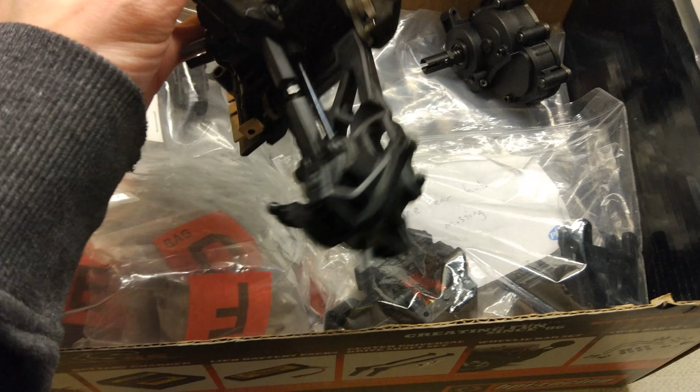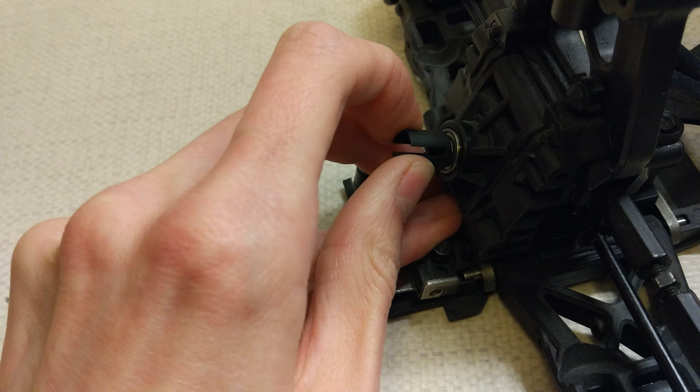It's similar to the Techno in that some of it has been built already. You can see they've built part of the front end here - clearly not particularly well. And the drive cup is also pulling in and out a lot, so that'll need shimming correctly.

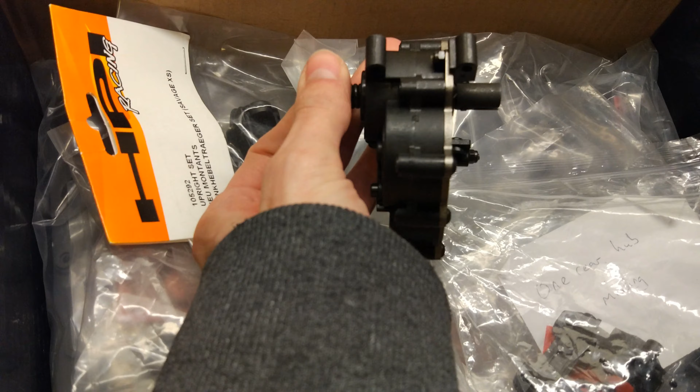They've also built the centre transmission, and they seem to have done a bit of a better job with this. Although I'm not sure about the slipper clutch, I want that to be assembled correctly, so I'm going to rebuild this transmission quickly as well.

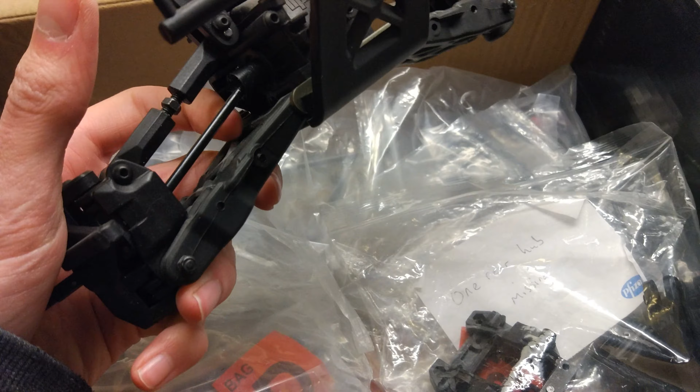And they've included a new pack of the uprights - these are like the hubs basically. I think the guy used this as a parts car because he did say some bits were missing, like the Techno had a few bits missing when I got it. He said a set of lower arms and upper arms and a hinge pin holder was missing.

So there are a few bits missing, but I have ordered those from Model Sport already. This looks - oh yeah, it says there's one rear hub missing, that's bag B in there. Then we've got some other bags which have been opened here - bag E and E2, I'm guessing they're bits to do the transmission. Then we've got DF, some other bits in there. You can see pretty much all of these bits are unopened for the most part - they're like the TVPs, I think, in there.

What's in here? That looks like maybe the battery tray holder. We've got the body mounts and the wheel hexes in there, and by the looks of it, the shocks as well - this has got aluminium threaded shocks. It's also got universal drive shafts, which are in there, look.

So yeah, looks like it comes with some thread lock, although it did come with this little bottle of thread lock in here already, so that's quite nice. I've got one of those already, but you never have too much thread lock. And then what's in here? I think we got some bits from the rear end in here. And then in the bottom, I think they're the part numbers that it needed, which I've already ordered, so I'll just stick that to one side.

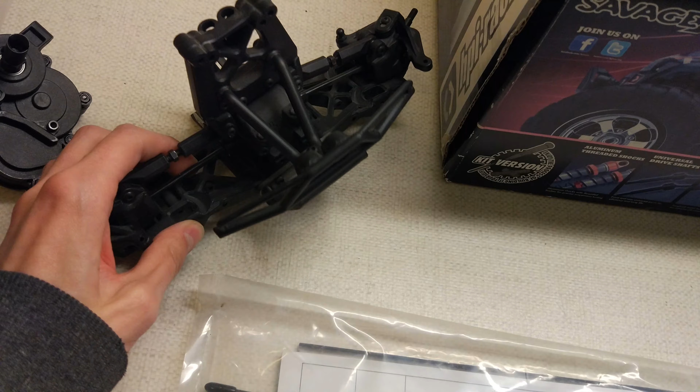So anyway, probably going to start by tearing this bit down and just checking through the manual and make sure it was built correctly. So yeah, that's my new Savage project. Might take me quite a while, but yeah, we'll see.

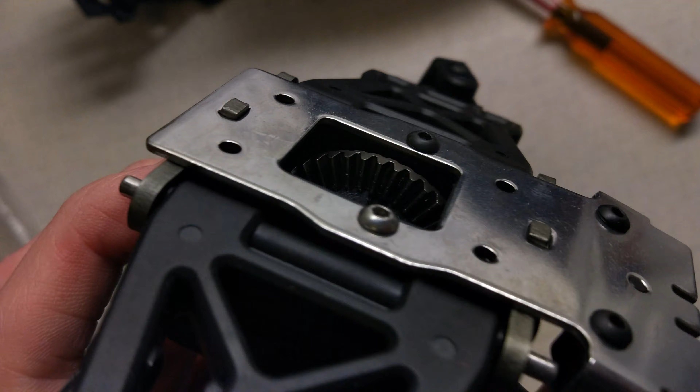I'm not going to film all of it, but I'll film any interesting bits for you. So I've just quickly taken the front bumper off, and you can see here there's no grease on the diff, or very little grease on the diff, so that's not a good sign. I'm not sure why this screw here is silver as well. That's a bit weird. Anyway, let's carry on taking it apart.

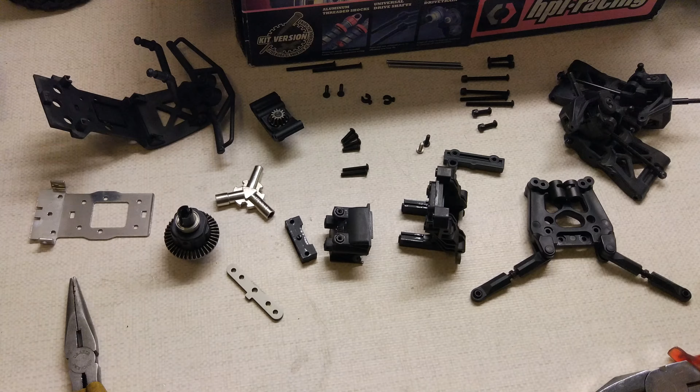I've only literally taken 4 screws out and those 2 little clips that hold the front bumper on so far. So I've managed to get the front end pretty much all torn down now. Mainly I wanted to get to the diff and this piece here, which is like the diff pinion holder.

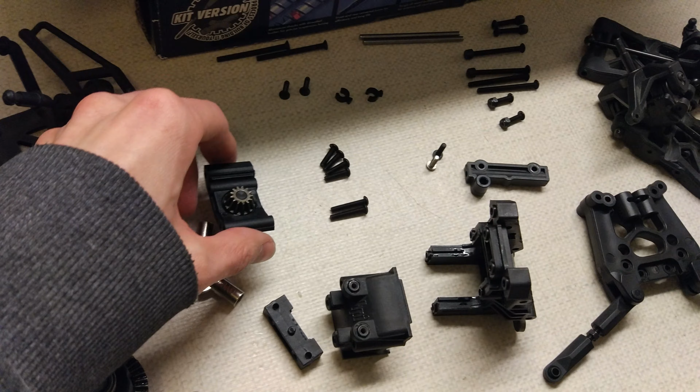There's millions of screws in this, way too many in my opinion. But yeah, I've left a few of them in. Bits that I don't need to rebuild, like the drive shafts and hubs, because they're okay. But I am definitely going to rebuild the differential and check that.

There's only been 1 stripped screw so far, which was that one next to the silver one on the bottom, and I only just got that off with the MIP driver, so the guy must have been using some normal Allen keys or something.

That's probably why he put a silver one in the other one, because it was stripped. And that silver one's also a bit shorter, so I wonder if he stripped that one and then thought he put a short one in the other side just so he didn't strip that as well. But I've got MIP screwdrivers, so I should be fine with all of the heads fully tightened up.

So yeah, let's tear into this diff. It feels like it's got oil in it, so we'll check it's shimmed correctly and all that.

So we just got the diff apart. It had a microscopic amount of grease in there, so I'm just going to fill it with some 7,000 weight oil. This is the front, so I'm probably going to go with 7 in the front, maybe 5 or 3 in the rear. Haven't decided yet.

But yeah, this is going to get some oil in it, because it does have rubber gaskets, these little rubber gaskets here, so it should be alright to put oil in. I know some of these older HPI cars don't have rubber gaskets, so you just have to fill them with grease and hope for the best, but if you can put oil in, might as well. Handle a lot better.

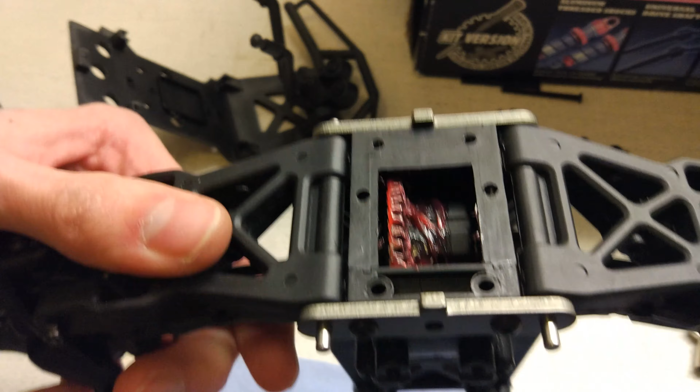So it's at this point in the build where you normally put your grease in, but obviously in the manual it doesn't say that. You can see I've got plenty of grease on there. Just turn it around a bit. Plenty of grease all the way around on that gear there.

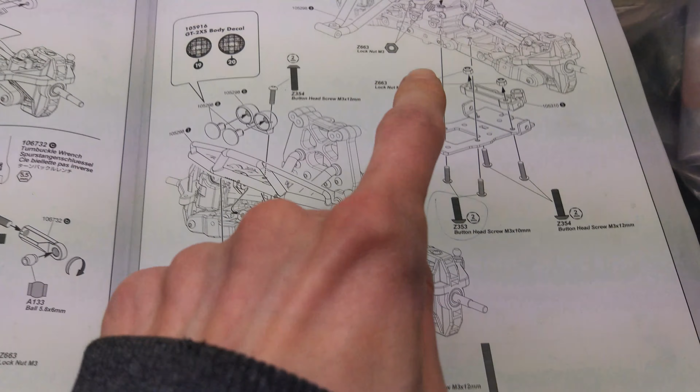And that's before I just need to put the metal plate on the bottom and the bumper back on. Then we've pretty much finished the front end off to where it started. Now there were a couple of bits that were wrong on this.

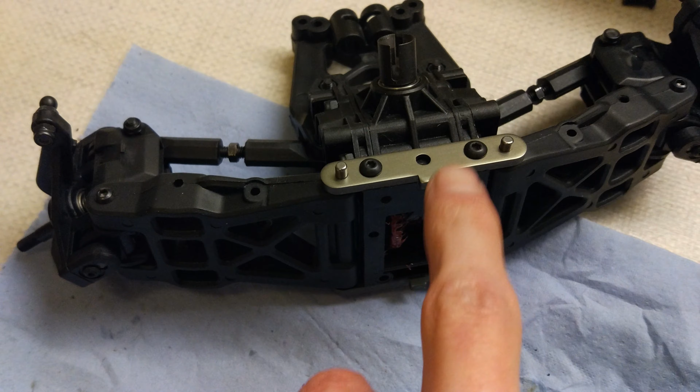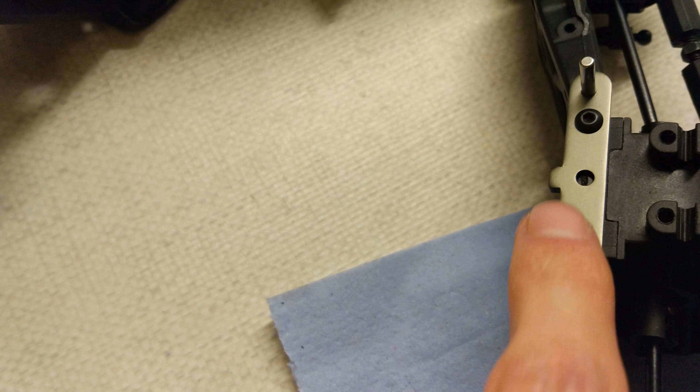So on the front here, well actually this is the wrong side, but one of these screws was 10mm when they're both meant to be 12. And then on the front side here, these were both 12 when they're meant to be 18mm.

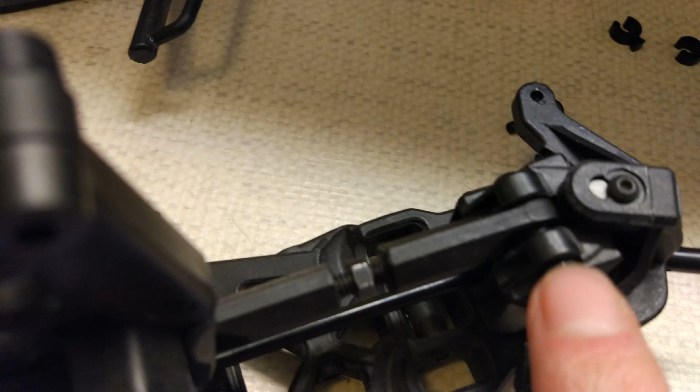On the hubs you can see this one here is 20mm on that side, and that was 18mm. These were both 18. For some reason there isn't another 20, which is what it's supposed to be, so I've just put an 18 for here on now. I'll put a 20 cap head on later on.

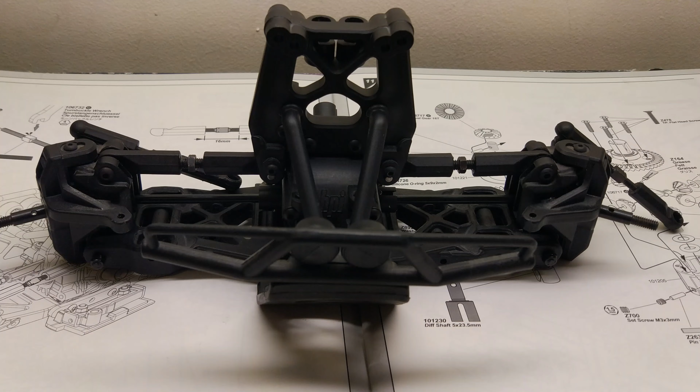So there we go, front end fully built. That's basically bag A. The other guy had almost done all of this, but obviously I've torn it all down, built it all back up again.

I did find a 20mm screw for that other side, and yeah, you can see I had to replace both those screws underneath with brand new 10mm, because even the MIP driver was just spinning in all of these 10mm screws here, so he's clearly tried a few and then tried an 8. So I've got a few 10s in this set here. They're not cap heads, they're only stainless steel.

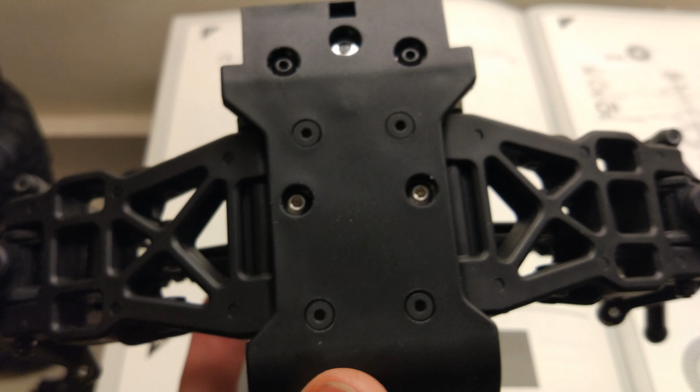I was having to push this in literally all the way to the bottom of the screw, so there's probably just a couple of millimeters left on them inside the bottom of the head, which is what happens when they get rounded out, because obviously the Allen key's rounded more off at the end so it doesn't mess up the very bottom.

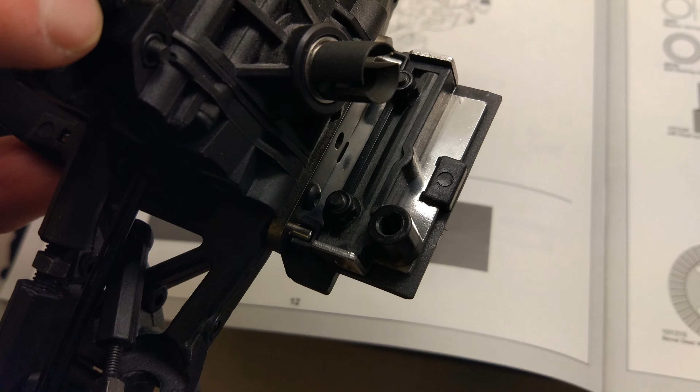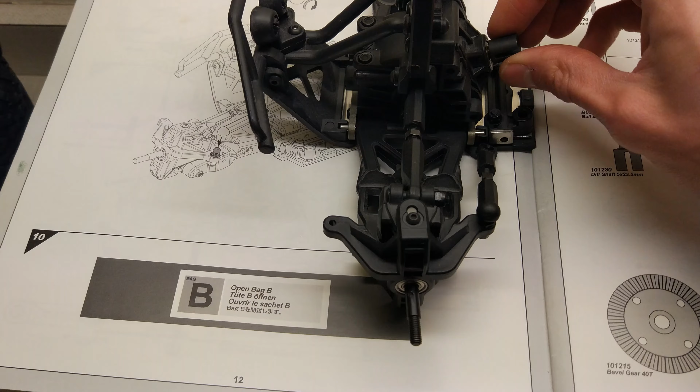But yeah, it's gone together correctly now. You can see I've just got that lip on there correct, and yeah, everything else was actually pretty much okay. The turnbuckles were a bit far out, but yeah, it's nice and smooth now. It still wobbles in and out there, which I don't really like, so I'm just going to leave it for now. Hopefully the centre drive shaft holds it in.

So today we're starting on bag B. Got all the bag B bits out. Already done the rear diff, just waiting for the bubbles to come out. Put 5,000 weight in this one, as you can see there.

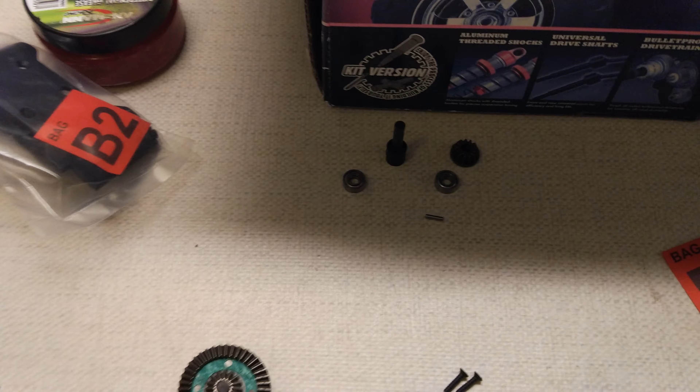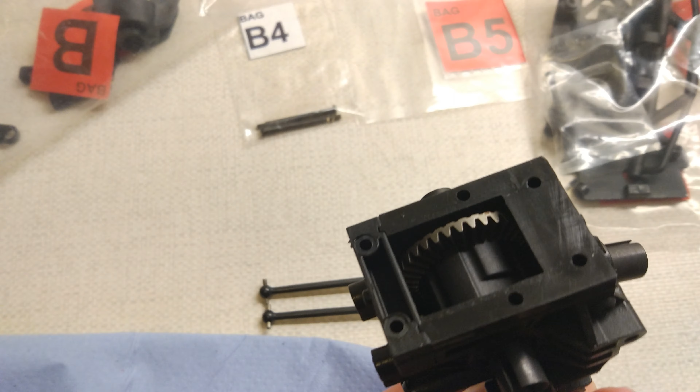This is the rear obviously now. So yeah, just screwing it together. We'll see how it goes. I've finished building this part now. Obviously I haven't put the grease on because I'll do that right before I seal it up, but it is nice and smooth. And I've also just built the drive shafts as well, so we're up to number 14 now.

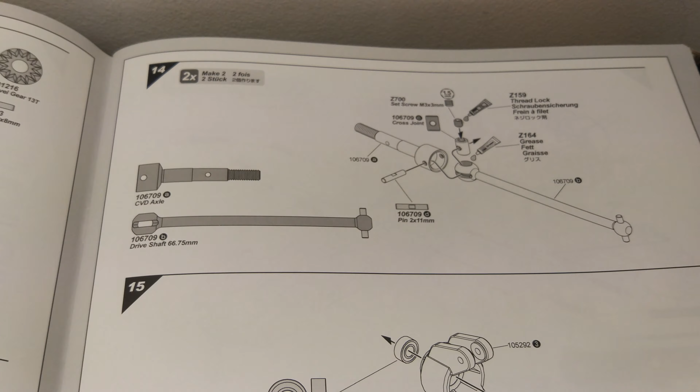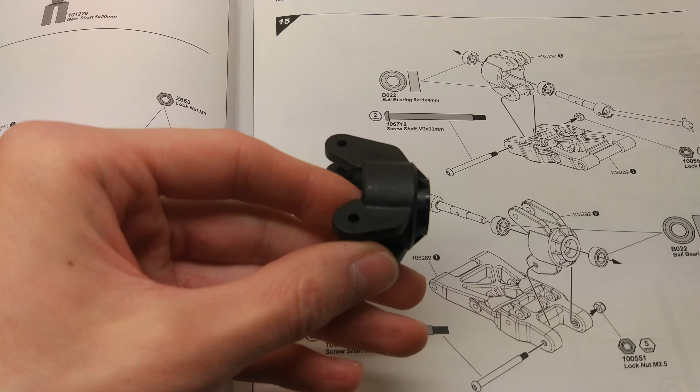Got to assemble the hubs and rear arms next, which I'll need the new hubs for. Obviously there's only one hub in this bag, but there's a spares bag in here with a set of new bits on.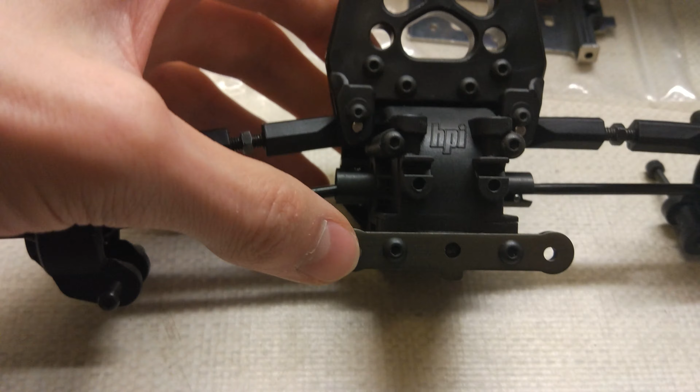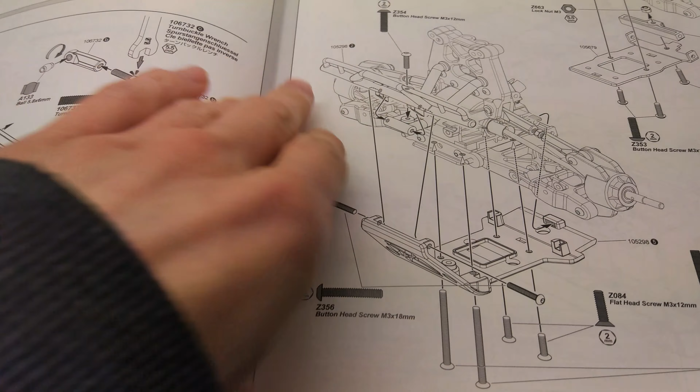We've got about as far as we can get with the rear end now, because I need one more hinge pin holder, the hinge pins and the bottom arms there. So that's about as far as we can go. I've also put that on there, but obviously I can't put the rear bumper on and do all that because I haven't got the bottom arms in yet. So that's where we're up to with that bit, so I'm just going to move on to the next step, which is bag C.

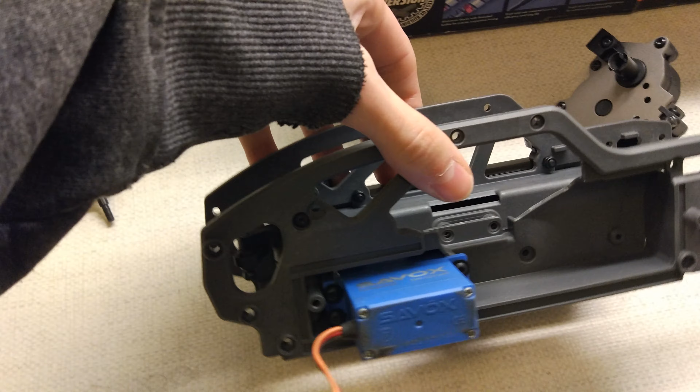You can see I'm using the Savox servo that was in my X-Ray, but the X-Ray's got a brushless servo in now, so I'm going to put it in this instead. It's 15 kilograms and pretty quick, so it should be alright for this.

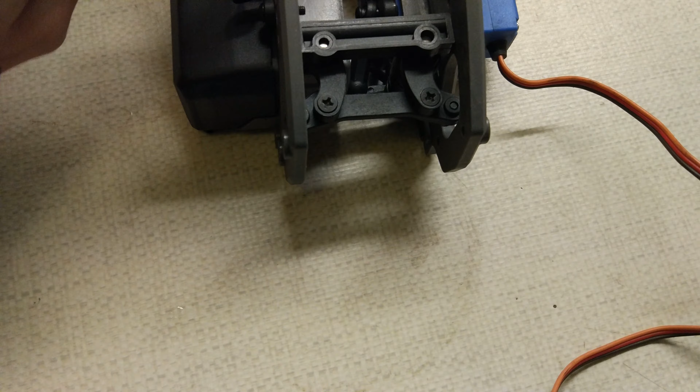The steering went together fine. The servo saver unfortunately isn't adjustable, which is a bit annoying, but it seems a bit, I mean, you can see how much play there is in that, but obviously there's nothing holding the bottom of that post yet either. So yeah, but looks like the motor and transmission just slip into here.

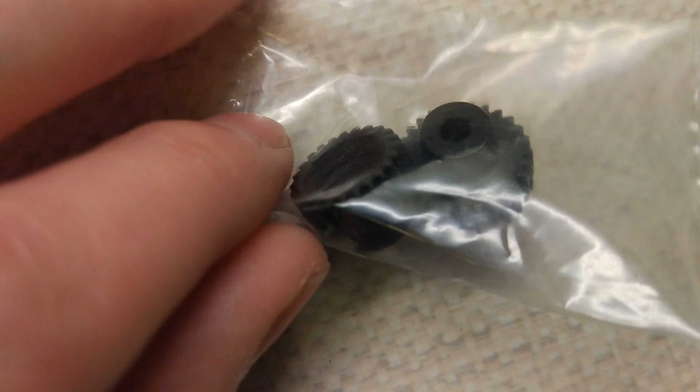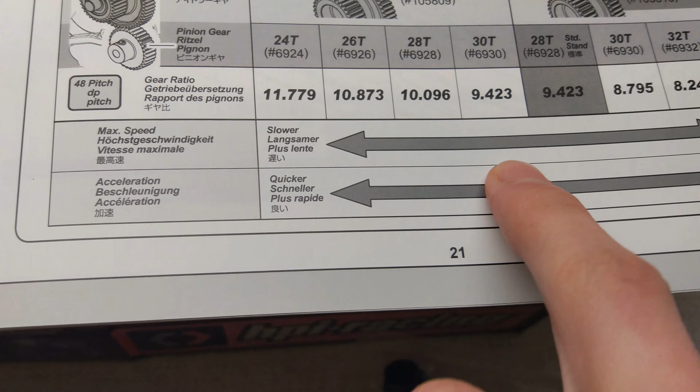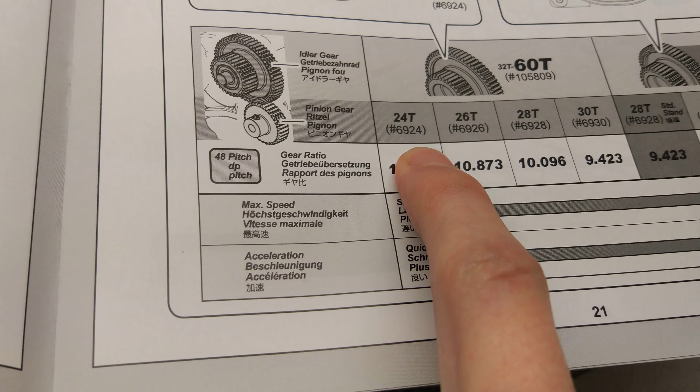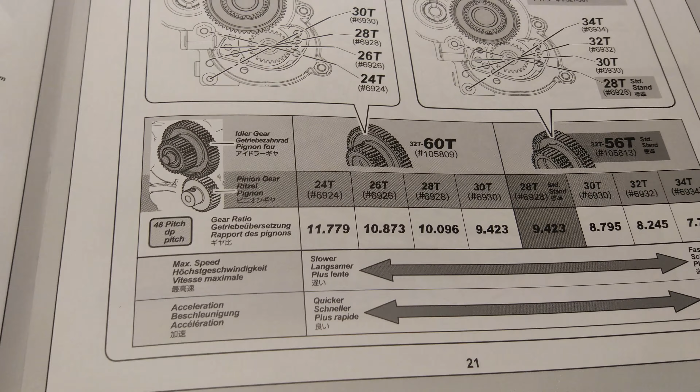So I've just opened bag E and it looks like the truck actually comes with both a 24 and a 28 tooth pinion gear. I guess the 24 tooth is meant for running 3S and the 28 is meant for running 2S. It's also got an extra spur gear thing here, and if you look it says to run 28 56 as standard, just there, but also there I've got the 24, so I'm guessing that I've got the 60 tooth as well, which should be good for running 3S, because obviously it's gearing it down a little bit. So I'm just going to run mine on 2S for now, so I'm just going to put the 28 in.

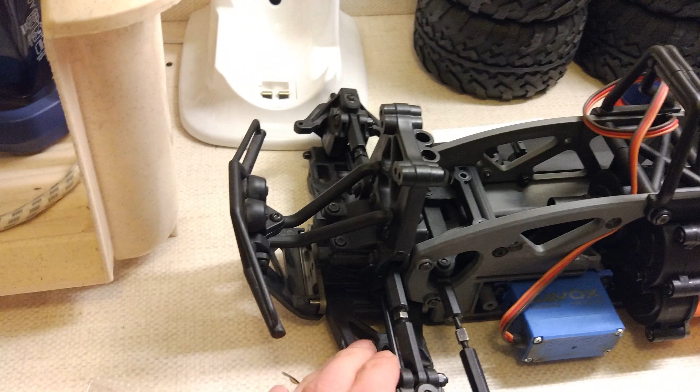It's only a few more bolts to put the motor on. You can see I've got the front end attached now, got the TVPs on, got the transmission in, got the servo in, battery box is connected. I haven't put this cover on yet because I need to cut a little bit more out of this bit here just to go around the motor wires.

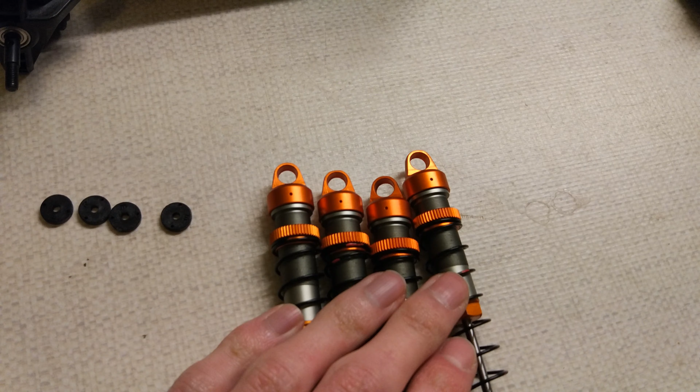I've also built the shocks. Still haven't been to Model Sport to get the bits for the back end yet because they haven't messaged me to say I can come in and collect them, which is a bit annoying. I also built the radio box, although that was literally just 3 screws and putting the gasket in. So I've still got the ESC and all that because I need to mount the rear end first. That's kind of holding me up now.

Pretty much done most of what I can. The shocks are really nice, all aluminium threaded body, and I think they're about 40-50 quid a set to buy. So the fact that they come with this kit, for a pair, I basically paid less for the whole kit than just these shocks are to buy by themselves. They also come with other pistons as well.

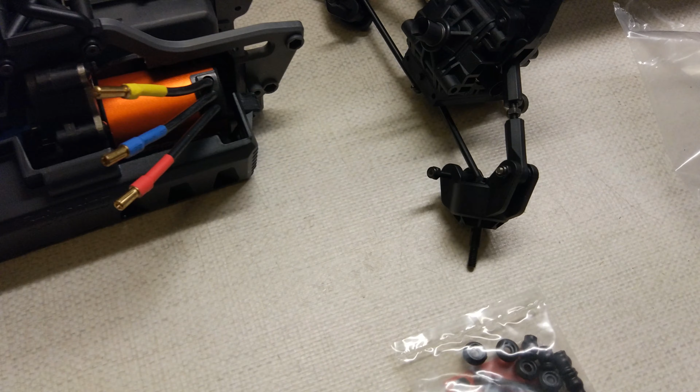That's the mounting hardware to put these onto the shock towers. Obviously I can only do the front ones at the minute, so I'll probably do that tomorrow. I still have quite a few bits to put on as well, and I still have the tyres to glue. I am just really waiting on the bits for the back end now, the hinge pin holder and the rear arms. So a quick little update on the Savage here.

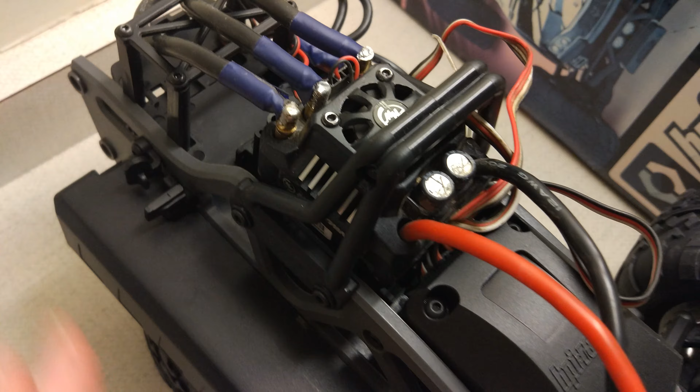As you can see, I've finished the front and centre section. Still waiting on some parts, getting pretty bored now. I've just stuck a Hobbywing Max 10 SCT in for now. Unfortunately it doesn't fit in the ESC tray, so I've just stuck it up there. I've got an Arrma BLX 100 ESC coming, so hopefully that'll be here soon.

The other problem as well is because my battery plugs stick out the top rather than at a right angle, the battery doesn't fit in the battery box. These connectors here, which the motor's plugged into, are right angled, so those do fit in the battery tray with the battery, and then the wires can stick out that hole there. But obviously they've got 4mm bullets on and the ESC's got an XT90, so I might have to bodge up a connector for that.

Anyway, it does turn on and run now, so got a receiver in there, a Fly Sky GT5 receiver. I took that out of the X-ray because I'm not getting an engine for that until next year now. So yeah, still got the GoolRC motor in, and obviously this is 2S.

So let me turn the radio on and I'll show you it working. You can see I've got a Savox on the steering. Not too bad speed, probably a bit quicker than stock, but not lightning fast. Got the endpoints set pretty much correctly. You can hear it's not really struggling, but it is turning all the way. There we go, so yeah, it is running now.

However, still need the parts for the back end, getting pretty bored of waiting, so that's why I've done this. Basically put the entire thing together other than the rear end now. I even put the ESC cage on, so that's just guiding the wires. This isn't strapped down either, it's just loose on there. But you could actually cable tie a Max 10 SCT right underneath that roll hoop and it fits in there really nicely, so that's quite funny. I don't know what you'd really do with this bit though, it's just kind of there.

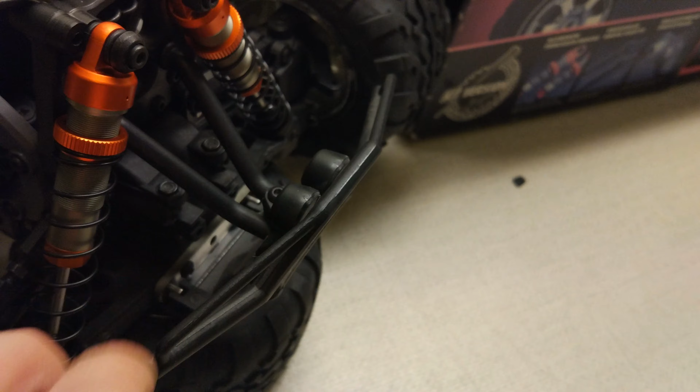Anyway, the shocks are pretty nice. Just take that tyre off - you can kind of see there, nicely damped. So yeah, pretty pleased with it, very nice and smooth as well. They're double sealed, these shocks.

Just needs, like I say, those bits on the back end. So I've just been down to Model Sport to get the bits I needed. I've got my wheelie bar, got my suspension arms, got this gear as well, even though I didn't really need that, but quite a few people on the Savage XS owners thread were saying they stripped them, so I've got a spare one of those. Got the hinge pins and the rear plate as well, so hopefully I'll be able to finish it off now.

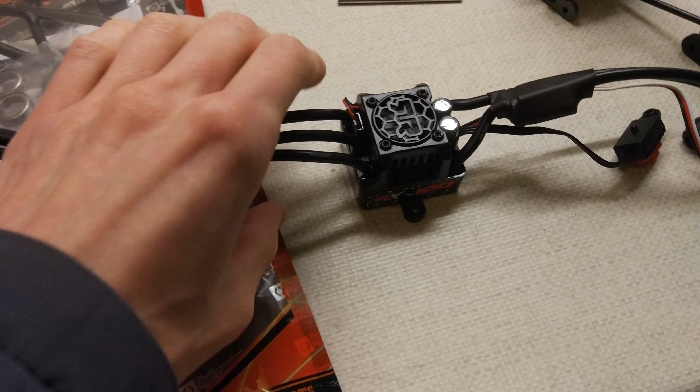So that's funny, the ESC's just turned up. You can see I've got an Arrma BLX 100, 45 quid off eBay, so not too bad. We'll have to change this connector obviously to an XT90.

That's pretty good timing really, because it means I can get it all sorted and up and running. So I had the Max 10 SCT here, but it's a little bit wide to fit in the proper casing, whereas the BLX is a bit thinner. Obviously I might have to cut these tabs off, but it should go in pretty well.

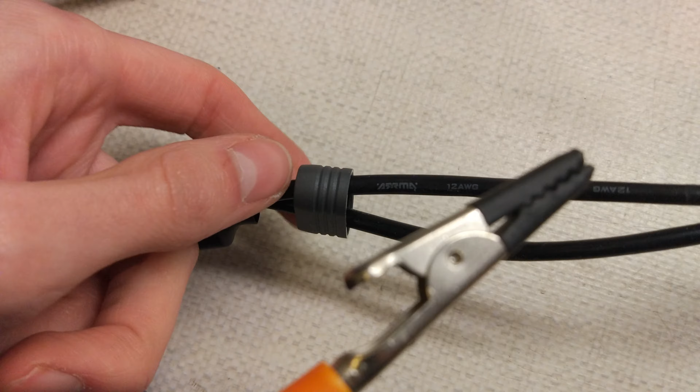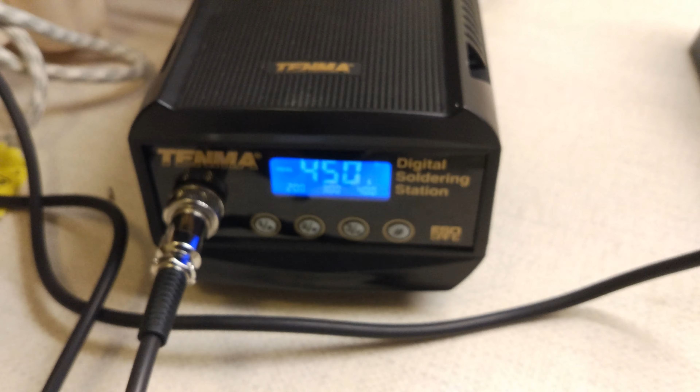So I've got the ESC here. I've just popped off that little grey cover thing from the XT90 to expose the solder so I can desolder it. Now I'm just going to solder this XT90 on. Got the iron set to maximum power, so let's get the XT90 on so I can test it. So there we go, got the old one off now.

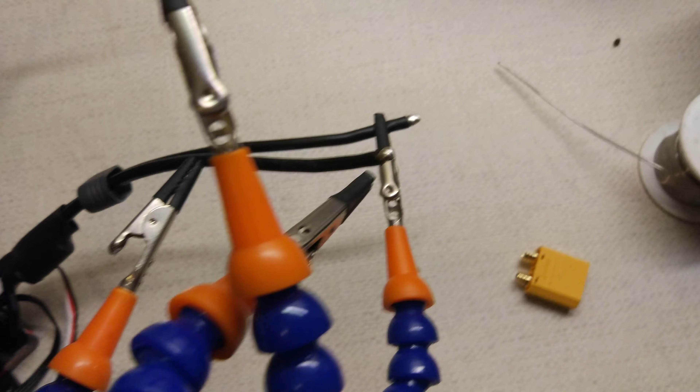Put the XT90 on. I also need to remember to take the black plastic thing off and put the XT90 yellow one on as well.

So there we go, we have a nice joint on both sides now, just need to wait for it to cool down. I've also put some heat shrink on there as well, so that hopefully it gives it a bit of extra protection. It didn't have any heat shrink originally, just had the cover, but the heat shrink will cover the rest of it as well.

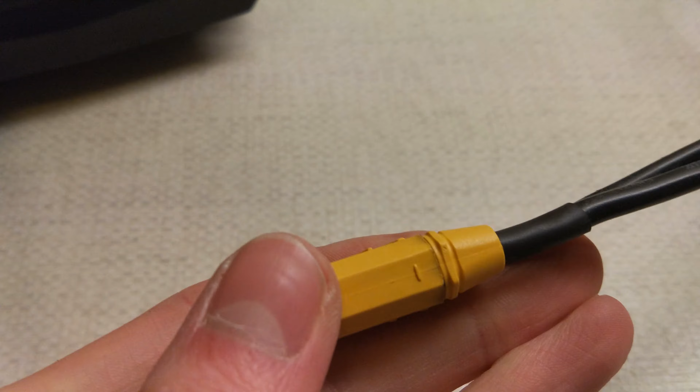So it should be okay now. The camera's not enjoying focusing on it though, because it's a pile of junk, but there we go, that's better. Brand new XT90 on the Arrma ESC, and just to double check, I've got the plus on the left hand side, which goes to the red, and the minus on that side going to the minus on that side. So it should be okay.

Best way to test it now is plug the battery in, but it's come out pretty clean. Did slightly get some burn marks on it with getting the heat shrink on, but it looks pretty nice now. Just need to cut those tabs off and then it'll be ready to go in the truck.

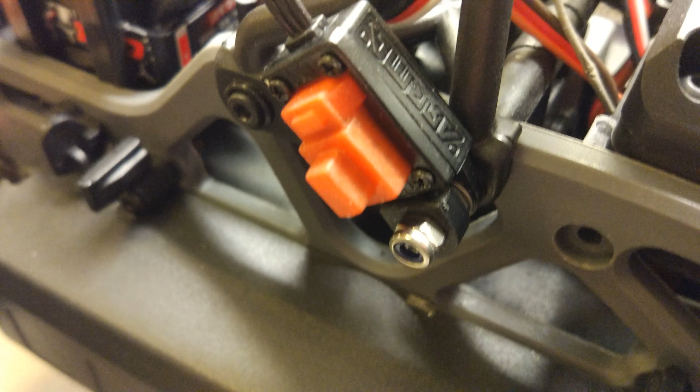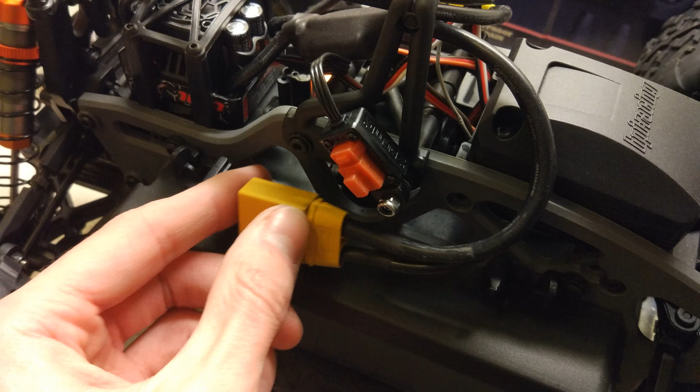The battery wire is just going to be threaded through there and come over like that to the battery. For the ESC, I've just put the top on. It is kind of bowed up a little bit, but it seems to be fairly sturdy holding it in, so I'm just going to leave it like that for now and see how it goes.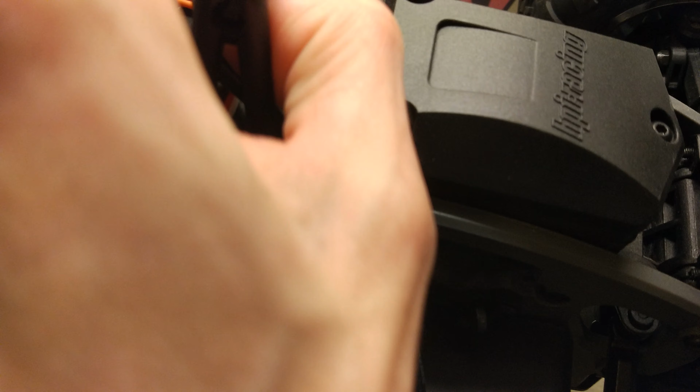The receiver wire's in as well to the radio box, and my aerial's just kind of sticking out the middle there. Hopefully I don't get any interference from the motor wires. It's not ideal, but we'll see. Hopefully it'll be okay.

Finally, the chassis is complete, other than the wheelie bar. But I've got all the electronics in, set up correctly, cable tied in the right position. Got some tape around the aerial here just to keep it up out of the way of all the drive shafts, which you can see through there. Got the motor in, shocks on, everything's all good. BLX 100 ESC, raised the punch level to number 5, so that should be good. Let me just put it down on the table so you can see the suspension.

See, it is a little bit saggy at the back. Let me just show you how low it is. So it definitely needs maybe a little bit more winding down. Obviously if you were doing speed runs at like 60 miles an hour, this setup would probably be good, but I think for bashing you need it to be a little bit taller. But that is really low, really planted, and very nice.